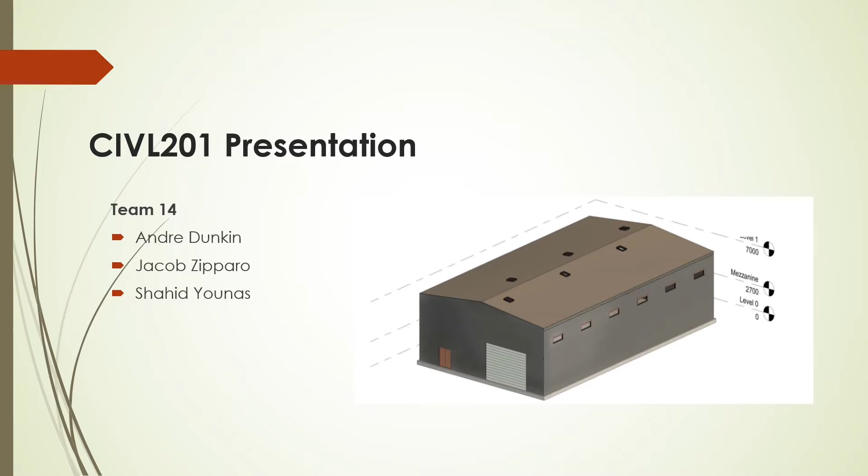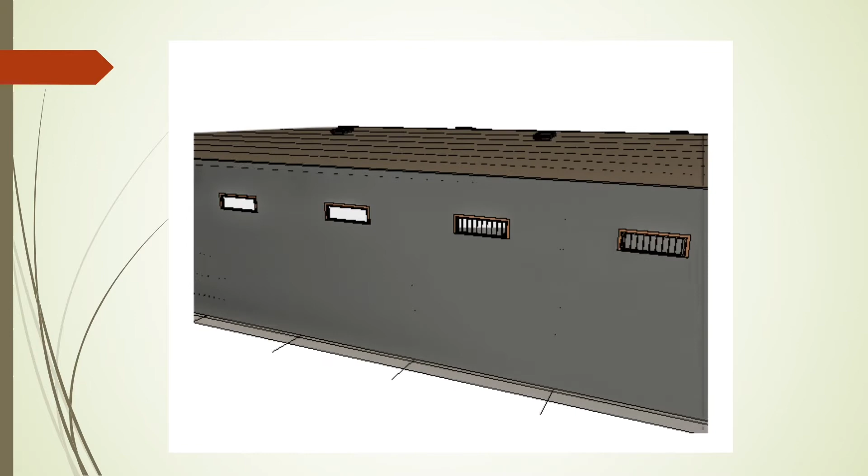Team 14 was tasked with designing a building to the specification of the client. The portal frame was to be designed in Revit and subsequently analysed in SpaceGass. The client specified the building to be 32 metres long, 18 metres wide, with a pitch of 6 degrees and eave height of 7 metres. This, as well as a rafter load requirement of 10 kilonewtons per metre.

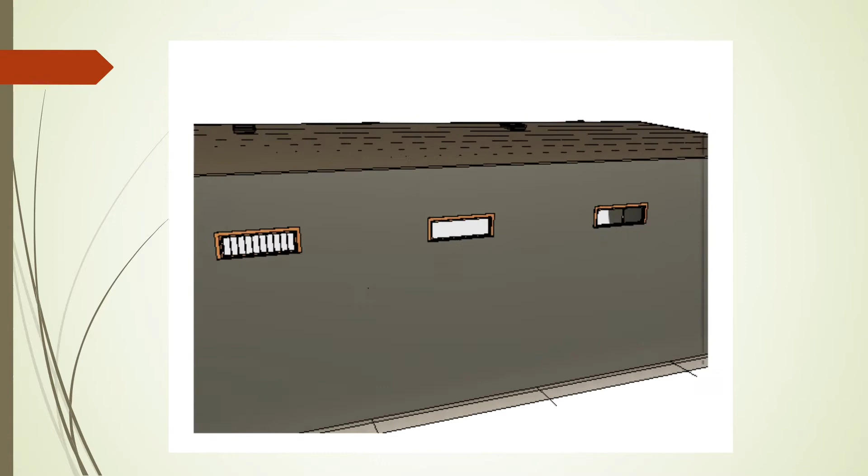The walls were to be Spandeck and the roofs to be Classic 700 Klip-Lok. As well as this, the client sought at least 10 windows and 2 doors, 1 roller and 1 regular. Furthermore, the client required an indoor mezzanine.

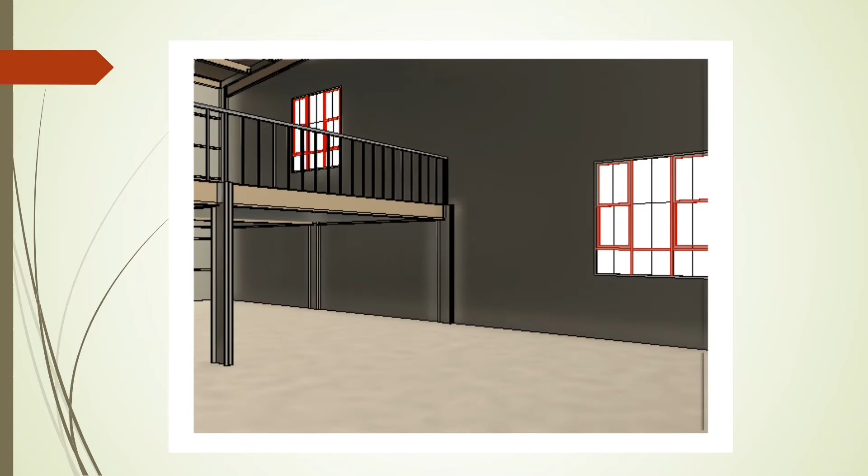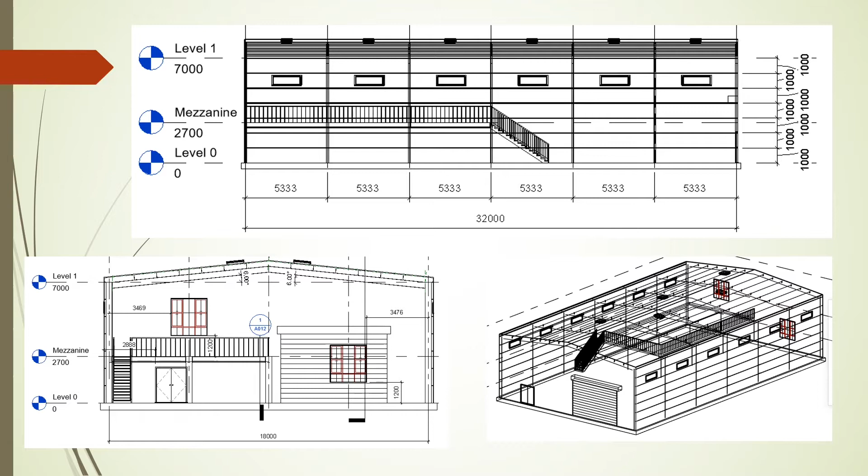In accordance with Australian standards, the 32-metre long structure was designed with 6 bays 5.33 metres apart. This was all built on a 400mm thick slab that overhangs the portal frame by 300mm in each direction. The mezzanine was built 2.7 metres high on UB steel columns with a suspended 300mm concrete slab. There was also access stairs and an 1050mm safety railing.

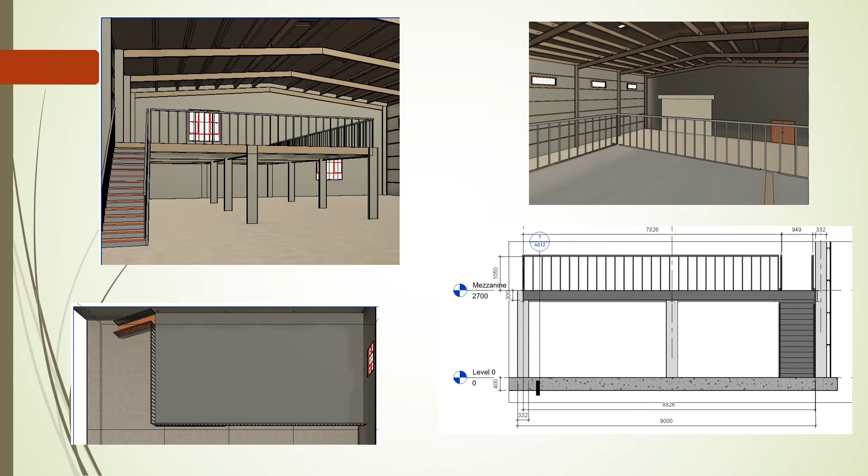There are some parameters of the designs. First of all, there is a column and the rafters. After that, girts and the purlin, roofing and the wall cladding. First, I will go for column and the rafters. Their build-up depends upon the design, and either it is required hot rolled structure shape or welded plate construction.

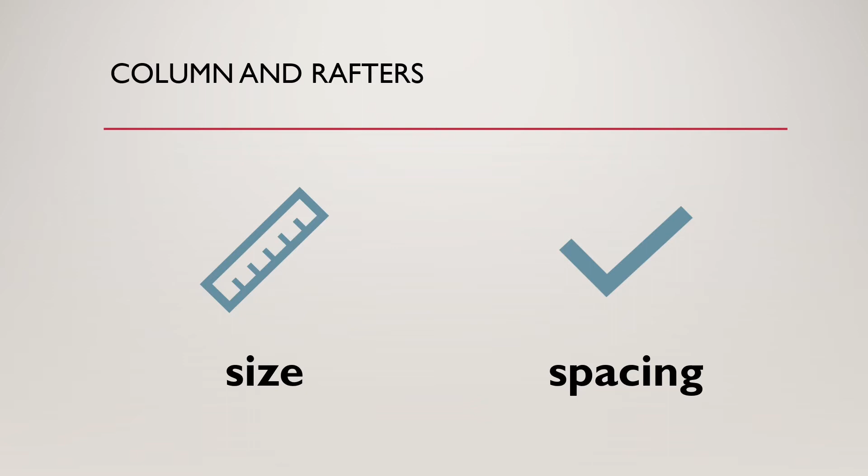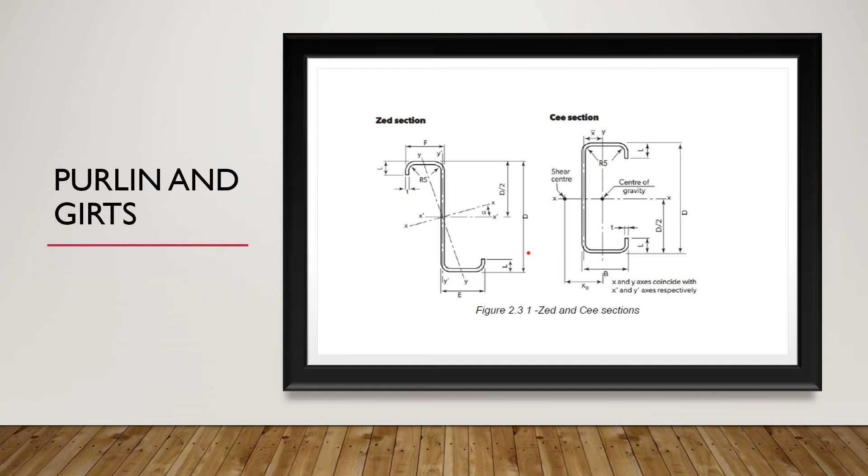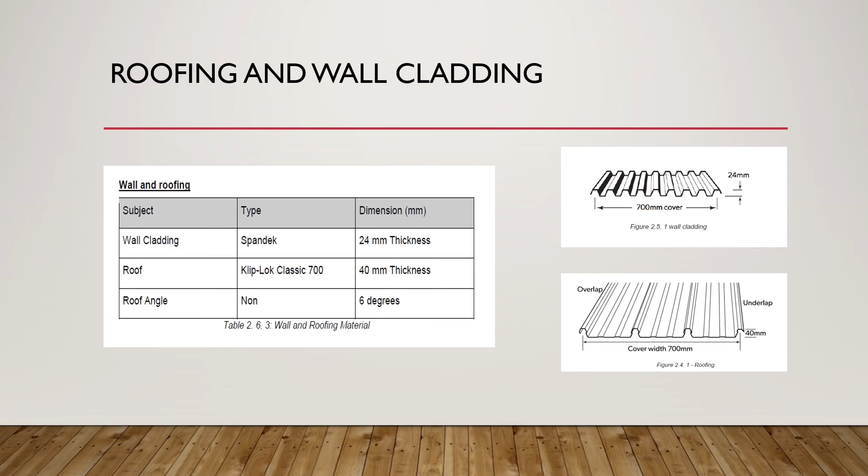Lastly, I will go for roofing and the wall cladding. Here is the wall cladding, and this type is Spandek, 24mm thickness, and the roof is Klip-Lok Classic 700, as the client mentioned, 40mm thickness, and the roof angle is 6 degrees. After that, at the end there is a table of all the parameters and their dimensions: column, rafter, girts, purlin, cleats, wall cladding and roof, and all their dimensions and details.

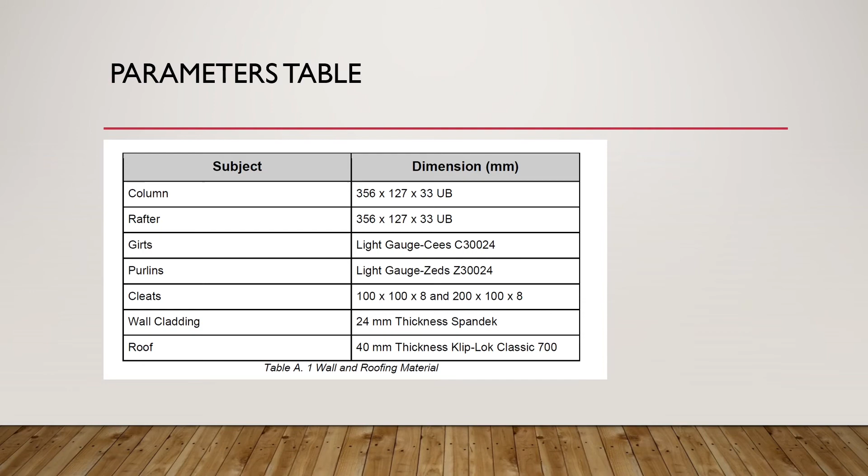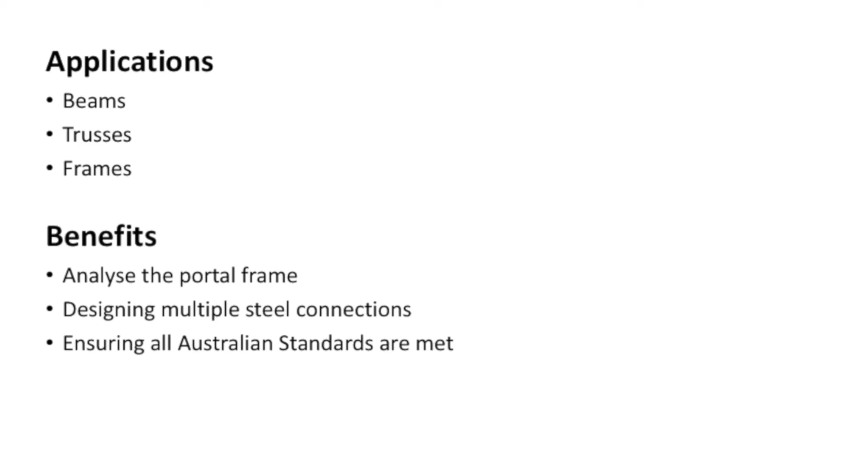After the Revit model of this project was designed, it was transferred over to SpaceGass using the same parameters. SpaceGass is a common engineering 3D design and analysis application that can be used for anything ranging from beams, trusses, and frames, along with many more features. The reason for using this application is so that the group can structurally analyze the portal frame along with designing multiple steel connections. This program is incredibly useful as it allows us to ensure that all Australian standards were met.